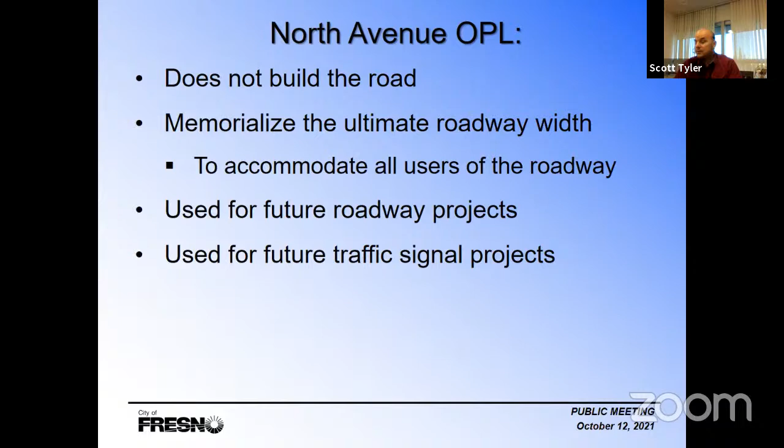What triggered the need for an official plan line? This is something we've done in the past for the city - we have recorded plan lines from the 1960s, so it's been used as far back, I believe, as the 60s. I don't recall seeing any in the 50s, but I've seen some recorded in the 60s. Again, this is to define the alignment of the road and define the ultimate right-of-way the road would fit in, depending on if it's an arterial or collector.

With the 2035 general plan, it changes the designation or number of lanes on North Avenue from a 4-lane arterial to a 2-lane arterial. And we get requests in the Public Works Department all the time from potential developers who want to know, where's the road going to be?

If I want to develop on this parcel, how much land do I need to dedicate for the project, and what am I going to have to do for improvement plans? This is something our traffic planning division can look up and provide to customers, being developers, to show them: here, this is a recorded document, this is the alignment of the road.

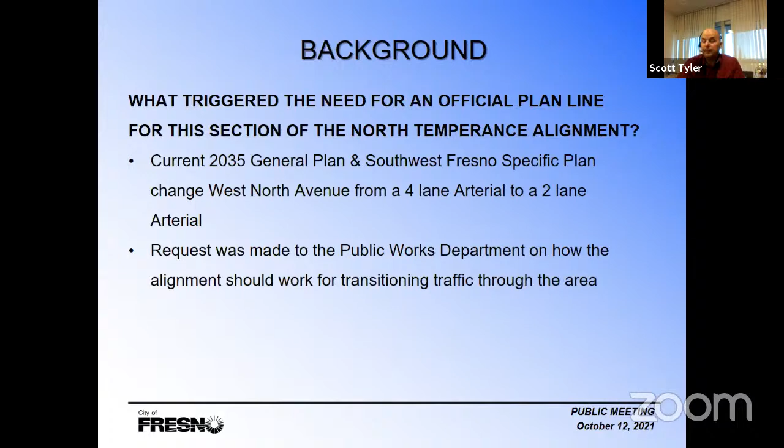This is just a general overview of the project, where we have the alignment stretching approximately 3 miles from Elm Avenue to Marks Avenue, well west of State Route 41.

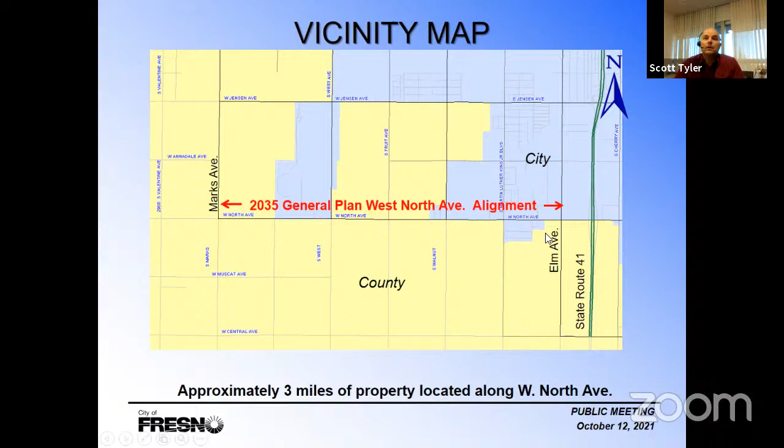This is the 2035 general plan land use overview of some of the uses proposed in the area, from open space to medium and low residential. The other side of the street is in the county, and that's in the city's sphere of influence. So whatever is developed on the other side of the road between Martin Luther King and Marks would be whatever is in the county's general plan for development in that area.

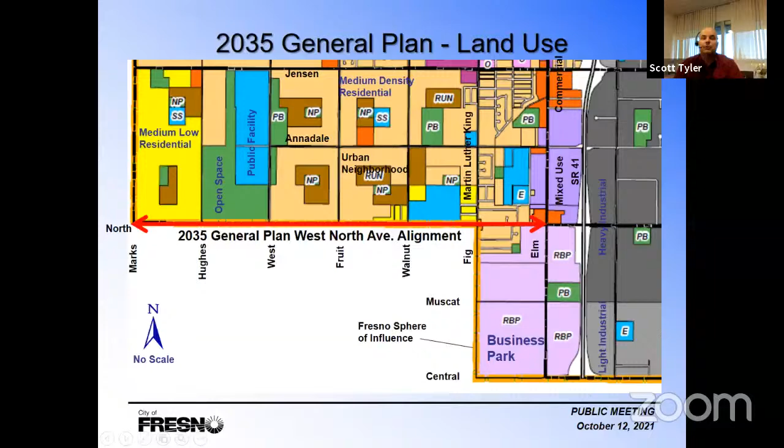So this is kind of a brief overview, kind of looking at that. I didn't check if this is up to date. It shows the distinction between what areas are in the city currently and what areas are in the county. The yellow areas are in the county, the blue areas are in the city.

So you can see from Elm to Martin Luther King, both sides of the street are in the city. West of Martin Luther King, the north side of the street is in the city to just past Walnut. And then again, there's another part between West and Hughes on the north side that is in the city of Fresno.

There are also other considerations taken into account on this project. You can see these blue lines - Fresno Irrigation District has pipes and canals that cross the roads in different places within the city on our major roads, and so we have to take those into account on any of our alignments and their existing structures today.

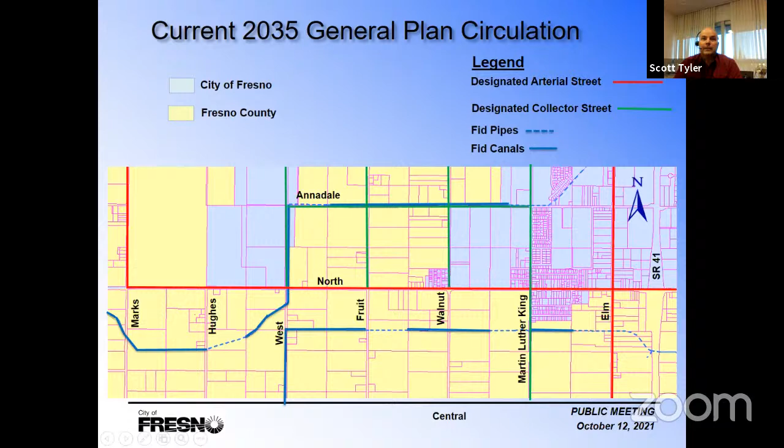So I'm looking at some of the constraints for the alignment. We have the general plan, which we're setting the alignment, or the number of lanes, to include bike lanes, sidewalks, and parking. Some of the areas that have existing residential uses, we're accommodating the existing parking to keep that in place.

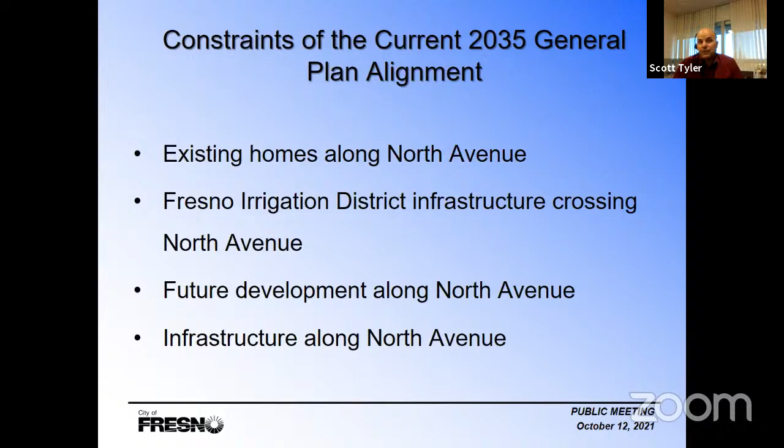Like I said, existing homes, existing uses - Fresno Irrigation District has accommodating infrastructure crossing North Avenue, looking at future development. Since we started looking at this, the county came in and built part of the road of North Avenue along the north side of the Cargill plant. So some of that work is done, and we will have to take that into account as a constraint, along with any existing and new infrastructure that could be placed along North Avenue.

So again, just kind of an overview - their alignment takes into account both sides of the road having existing homes, and coming further west, existing homes and existing development already built out on the north side of the road. So we don't want to have the road impact existing homes or take any unnecessary right of way for the existing users.

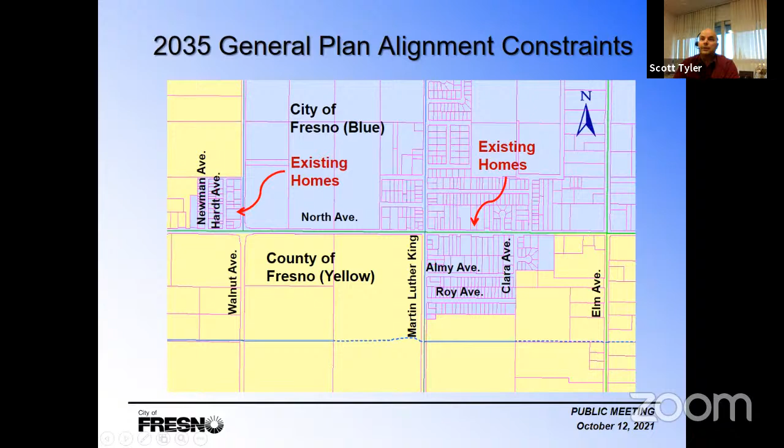Also incorporated into this is the 41 North Corridor Complete Streets Plan from 2015, and this was also incorporated in the Southwest Fresno Specific Plan in 2017.

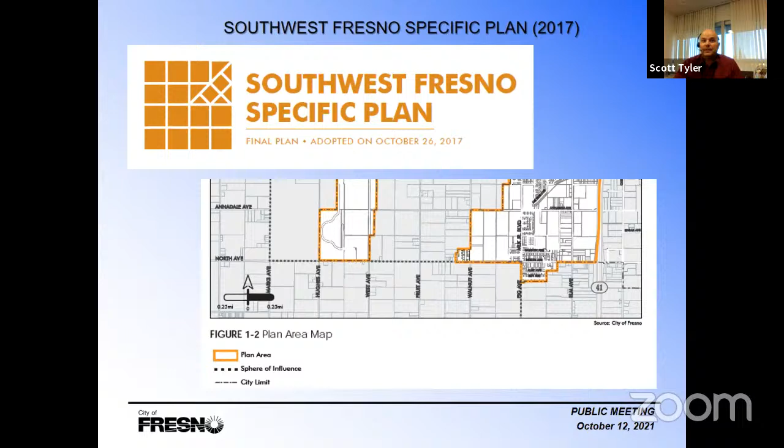These are some of the features that were part of the plan that looked at cross sections of the road, from existing today where you have a 2-lane road, moving over to a 2-lane road with bike lanes, buffered bike lanes, on these two different examples.

I'm not sure if everybody can see my screen very well on some of those, so I'll just leave them up for a second. So I have the proposed sidewalks, bike lane, a buffer, a travel lane going east and west, and a bike lane.

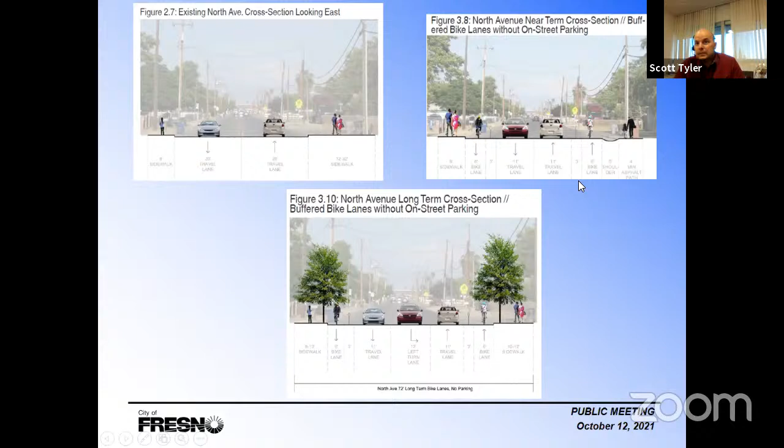Part of that, we were looking at accommodating parking. So we have a City of Fresno standard for a Collector Street that could accommodate what was being proposed in the general plan for a 2-lane road. Typically, this includes 8-foot parking, a bike lane, an 11-foot travel lane, a 2-way left turn lane, another 11-foot travel lane, a bike lane, and again parking.

In areas that are undeveloped that don't need parking, the road width can be reduced to accommodate just the sidewalks, the bike lanes, the travel lanes, and a 2-way left turn lane.

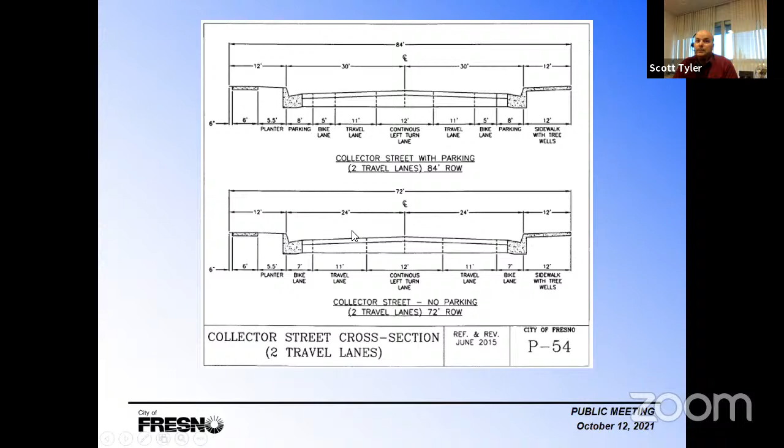Part of the next steps on this is taking feedback from the public and adjusting as needed some of the features or alignment of the OPL, where we have to go back and revise our OPL based on improvements done by the county with their EDA grant, or by the Fresno Metropolitan Flood Control District.

Once we have that completed or corrected and addressed any comments that might come from this meeting today, we will look at a planning commission hearing in the next month or two, and then after that, take it to city council for adoption a month or two after the planning commission.

With that, I'm sure everybody has a number of questions, so we will open it up for those that want to raise their hand, and it looks like Vanka Saunders has her hand raised.

Good evening, you guys. Can you hear me? Yes. Hello. Thanks for inviting me, Andrew.

I also wanted to know, did you guys engage using that 1,000-foot notification process? Is that how residents along North Avenue would have found out about this meeting tonight? Yes, correct, we did. We had over 1,000 feet, and we had over 400 mailers sent out.

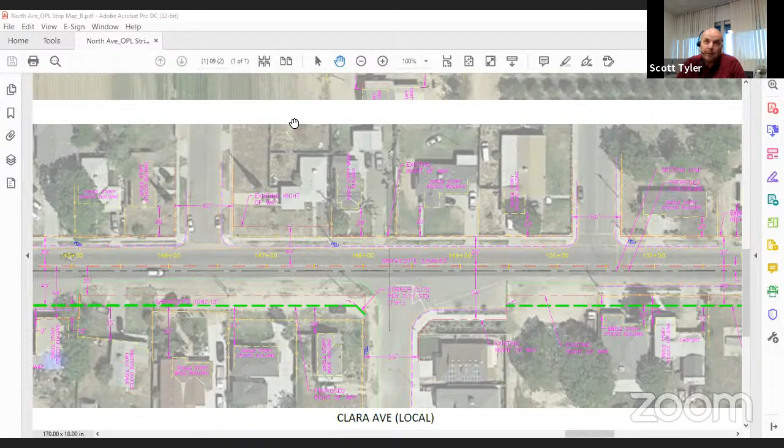This faint line that the mouse is running over is your existing property line. The green line is the proposed property line, so the sidewalk and everything would be on the north side of that. Based on our topographic survey, the fence line was actually even further back, like it was set to an old alignment. On the opposite side of Clara, your fence line looks like it was set back to match that future road width, which is not what we need today. So with this OPL, we're proposing less right-of-way needs for the street than previous development.

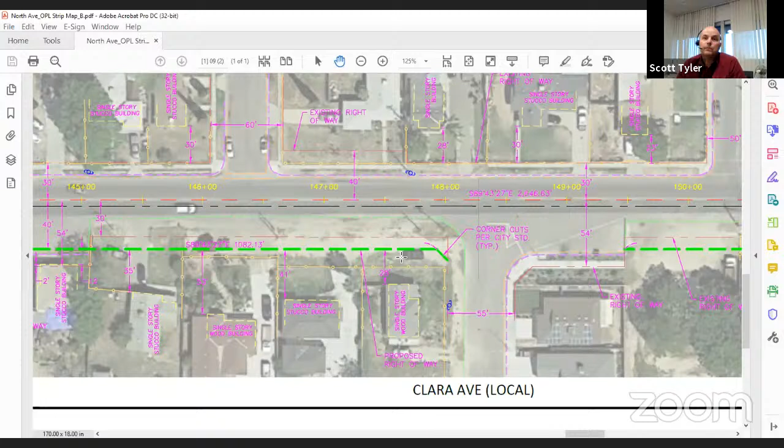I believe this orange line represents your fence. I don't know, I can't confirm that's there today. So if you haven't taken that down, once we finish the OPL, that fence line could actually be further out to the north. Okay, thank you for that information.

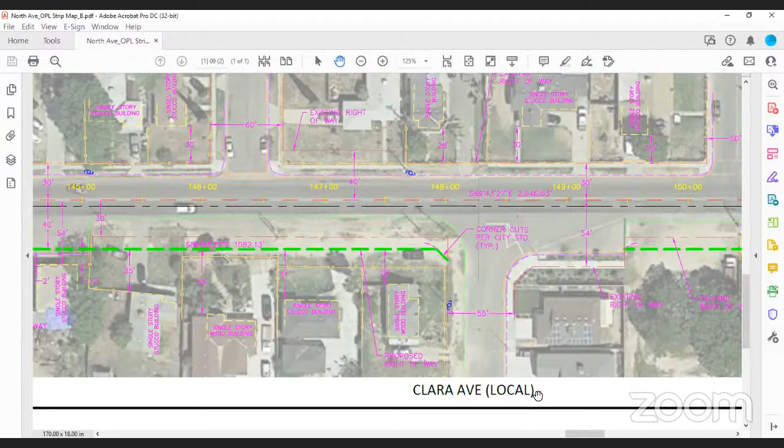Is there anyone else in the meeting that would like to see their property?

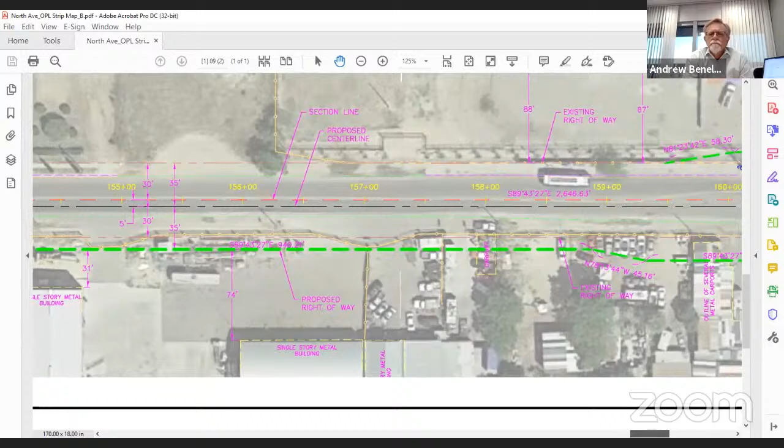That's the easterly limits at Elm.

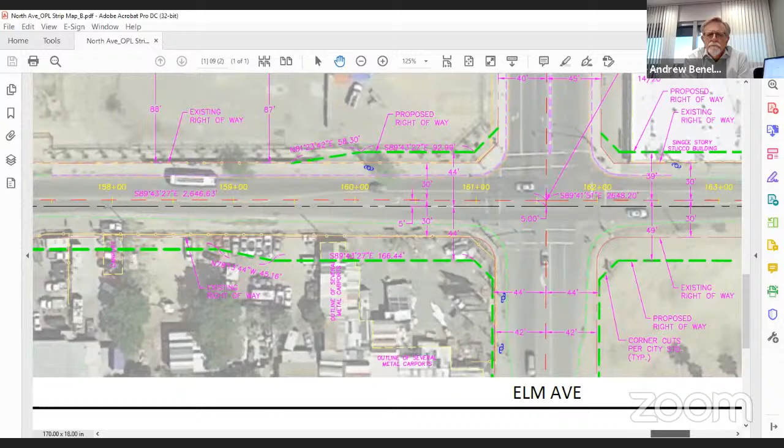Are you able to hear me? Yes. Could you give me that email again, please? For Will Tackett, yes. Do you see his name, Will Tackett, on the screen? No, I don't see a Will Tackett. No, I don't see it. Okay, it's Will, W-I-L-L dot Tackett, T-A-C-K-E-T-T, at fresno.gov. I did just add that to the chat for reference if you need it, Mr. Timms. Okay, thank you.

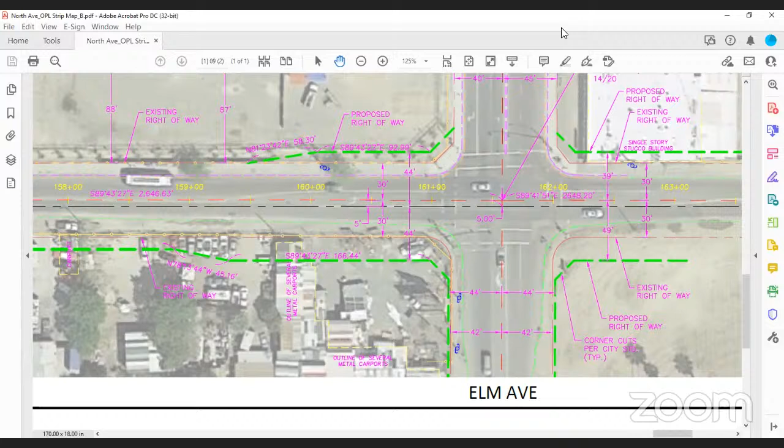It appears that's it for questions or comments. I think for everyone in the group, you can reach any of us with first name and last name, with a period in between, at fresno.gov. We try to answer emails we get from the public, especially.

Excuse me, are you guys able to hear me now? Yes. I was trying to, okay, it might be too late. Is there any way you can show me my house? Yes, thank you. What intersection are you close to?

2429 West North Avenue. 2429, West North Avenue, right on the corner of Hughes and North. Looking like the southeast corner there, Scott. All right, give me one minute and I will try to pull it up.

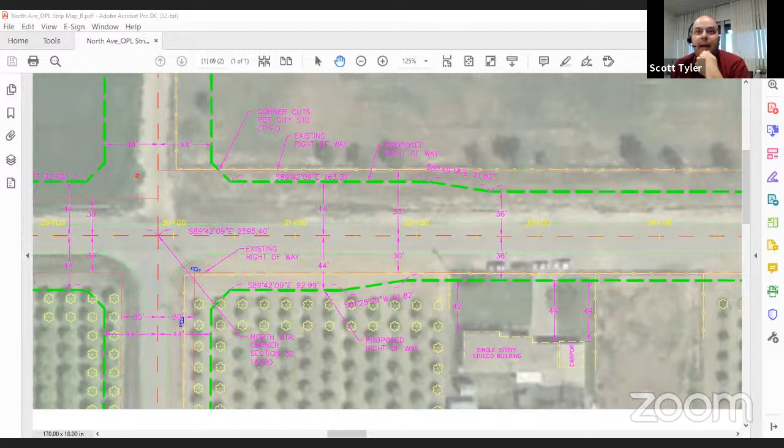I would contact Kevin Gray. He handles that. I can look up his phone number, but his email would be his first name, Kevin, period, Gray, at fresno.gov. If you want his phone number, I can look it up, just take me a minute or two. Okay, that'll be great, thank you. Let me look it up. Thank you, I have it right here, Andy. You have it? Yeah, it's 621-8553. Okay, thank you so much. You're welcome. I did also add Kevin's email to the chat.

And this property is in the county, so it will require an agreement with the city to do that, but Kevin can answer your questions. Thank you so much. Sorry about the window in the way.